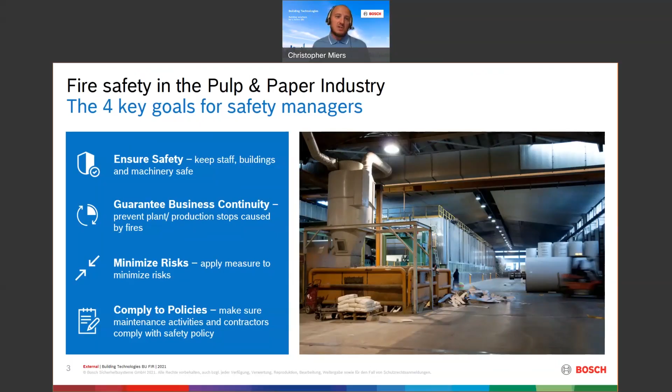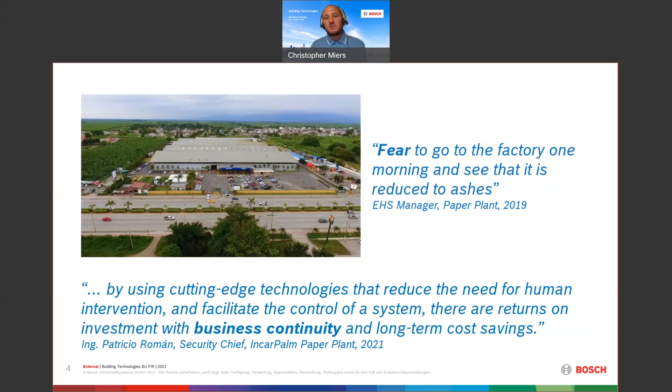So investment in cutting edge technologies enables a better return on your investment, and you're able to do more outside of just protect and analyze, we'll go into that a little more as we continue. But by using those cutting edge technologies that reduce the need for human intervention and facilitate the control of a system, there are returns on investment with business continuity and long-term cost savings. Extremely important.

So looking again at the pulp and paper industry, all different types of scenarios within a facility. You either need to look at production areas where you have small to large machines. The risk within those machines could be conveyor belts going into the machine, hot surfaces, overheating machines, static electricity. All those types of things are focused specifically on that production area or that machine, again a single machine focus as opposed to, say, maybe a larger area focus.

And we have service areas, so more fire risk due to damaged wires or equipment, boilers powered by flammable liquids or gases, or sparks in those areas. And when you have sparks and there's dust or dirty environments, you can fully understand that those risks will certainly increase the dirtier or dustier that environment would be.

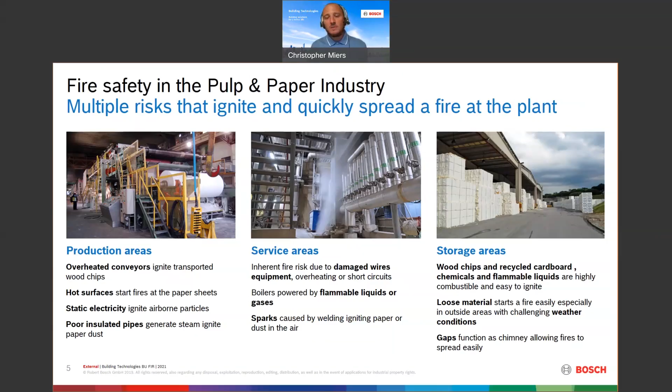And then we also want to focus a little bit on storage areas. Those storage areas typically are outside but up close to the building, have some sort of sheltered area over them, something to give it a little extra than just being fully in outside elements. But in those areas, wood chips, recycled cardboard, chemicals, flammable liquids, those are all things that typically go in those types of areas and are all high fire load.

So again, specific challenges require a solution. Multiple things to look at: high fire load, storage of highly combustible material, combined with the manufacturing process—similar to what we talked about with the machine, where something's coming in from external to internal, and all that environment is certainly unpredictable, plus the difficult environment within or even outside of that building.

So paper dust, dirty, dusty, humid—we don't focus on a lot of this maybe in industrial facilities, but obviously now we're talking about the pulp and paper industry. It's not something that at the end of the week everybody goes through with a dustpan and a broom, and when you walk out of there, you could probably eat off the floor. These are areas where people work hard, work quickly, and these products are something we want to get out as quickly as possible.

And then again with the outside storage areas, you always have challenging climate conditions to be aware of. So all of these specific challenges would require something additional on top of your traditional fire detection systems, which, as you've probably experienced in the past, could take a long time to identify a fire.

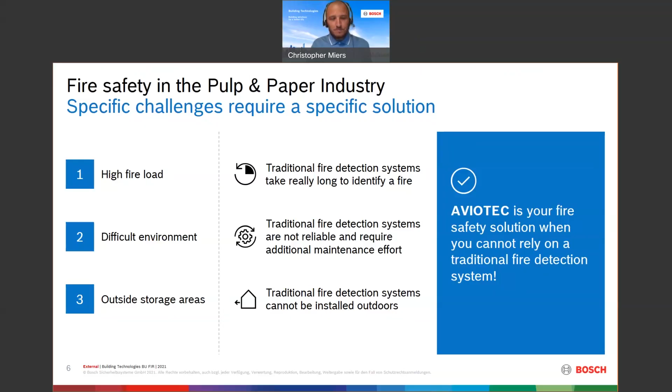Okay, looking at some of the use cases here. When a traditional fire solution is slower to alert, with standard fire cases, identifying flame or smoke within seconds is how we want to overcome that. It's detection directly at the source. Height is independent of detection, and it also works well in bad lighting conditions. Every facility is different, so we want to make sure Aviotec is available for almost any of these types of conditions—a fire starts fast, directly at the source.

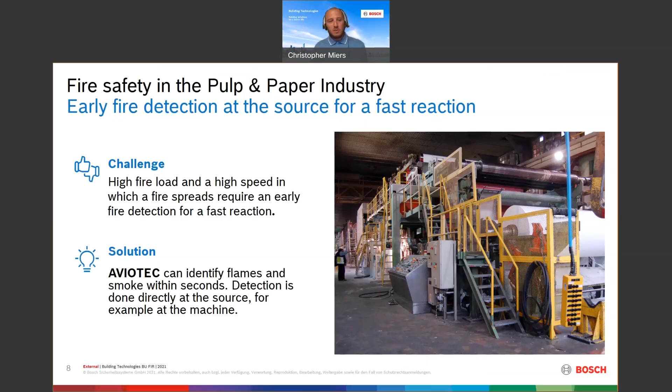And we want to be able to analyze that video source as well, so even later we can grant better safety, knowing the situation at hand. At the end of the day, we want a quick reaction to increase safety and avoid evacuations and/or business interruption. As we stated at the beginning, if you have a business interruption or have to replace a machine, that's extremely expensive.

Now, detection in difficult environments—the challenge of working problems for regular fire detectors due to humid and dusty environments. Dust will impede fire detection, it increases your safety risks, and it increases false alarms. So AVIOTEC slides in again when traditional fire detection is not appropriate.

And you'd also have a housing that protects the camera from outside elements, whether it be weather, dirt, or dust—stuff that would also probably do more damage to a standard fire detection piece like a smoke detector or linear detector, something like a beam. So those dirty, dusty environments tend to be a lot more harsh on traditional ways of doing fire detection.

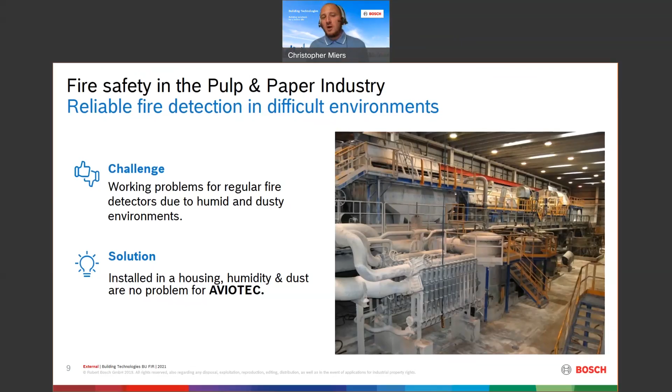Also easy maintenance in these types of difficult environments. Typically with the traditional style, you have an increased maintenance effort—whether you have a conventional or an addressable system, if you don't know exactly where that detector is, the service on those can get extremely high. Easy maintenance with AVIOTEC is not a problem, and you're compliant with that housing, so you get not only compliance but easier maintenance measures, day to day, week to week, month to month, year to year.

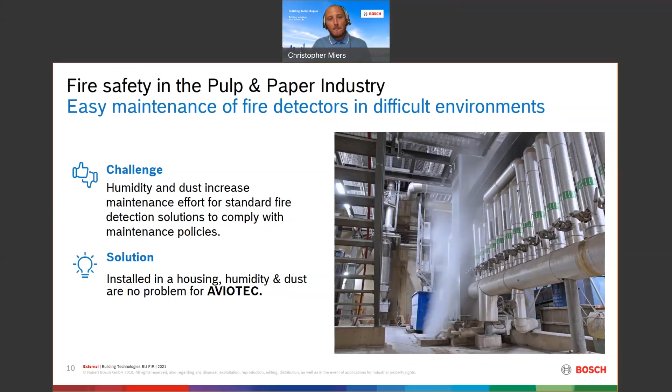And then also with the sheltered outdoor storage areas with highly combustible material, this new solution is based on something you've never really seen before for these outside environments. Typically people go with something like thermal detection, whereas Aviotec takes into consideration these outside conditions, hitting it directly at the source. Again, it's something we can do within seconds, as opposed to having to wait or decide if it's a false alarm or not.

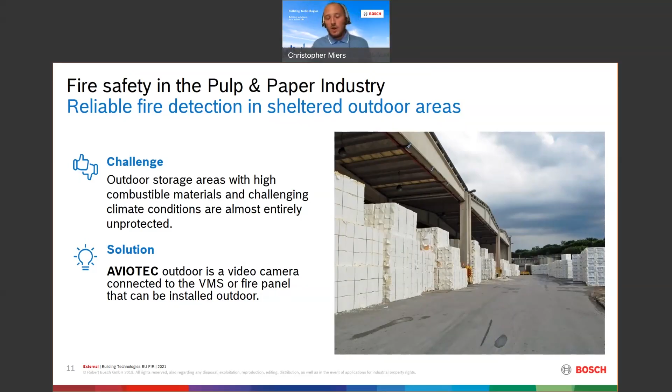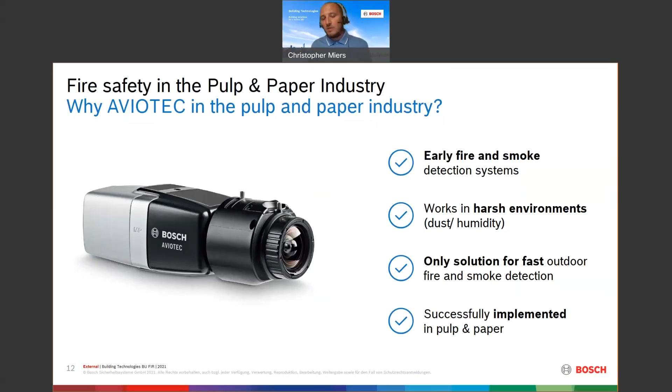That's the other part that's extremely important - seeing this work already in these types of environments, and the success that we've had with this camera makes us super pumped to talk about this solution, and make sure anybody with these types of conditions in their facility gets knowledge on this product and can decide for themselves if this is something they want to implement for additional safety measures.

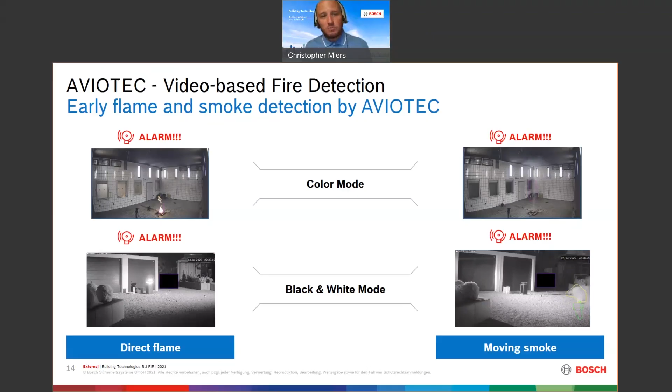In color mode, it does take a little bit longer because we have the whole video sequence and the flame or smoke needs to start to be detected. I'll let this go through so you can get an idea of what looking at the source would be like, in some of the demos we provided. You can see it's still constantly looking and identifying, that on the bottom left there.

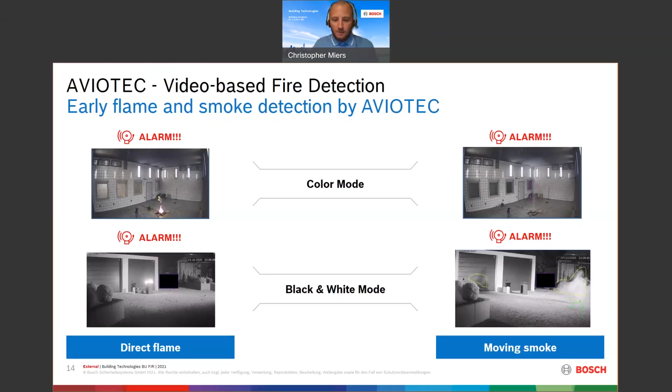Now, how does it work? You see that flame or smoke at the scene - the algorithm is integrated into the camera, so it's not a software-based system. It is directly in the camera, and it'll analyze that scene in real time at the source, and then that'll live stream, and alarms are transmitted via a network to the monitoring center.

Now, because I mentioned the algorithm within the camera, at the source, I know one question would be, well, aren't there other analytics involved in these cameras? And the answer is yes. It's still a Starlight IP 8000 camera - we've added in the smoke and flame algorithm to make the camera even better. But the flame and smoke algorithm will also work in parallel with all the other standard IVA functions. So it's kind of a hybrid, for additional safety or security measures.

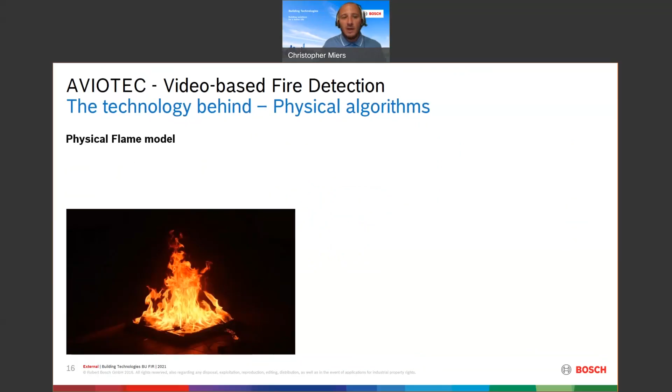Looking at those models separately, because they will alarm separately, you have the physical flame model. The characteristics we're looking at with a flame are the core or shape, the flickering effect, and the illuminance rating. Looking at the smoke model, it's that motion of transparent objects, upwards or sidewards movement.

As we move into the outdoor sphere, different climate conditions are always going to be there. We even see this in indoor climates as well, where you get some sidewards movement based on the environment within that facility. And that's why, in this case with sidewards movement, it's never going to get up to a standard smoke detector or a beam. So really, when traditional fire detection is not available, AVIOTEC is the way to go - and it distinguishes between uprising smoke and objects.

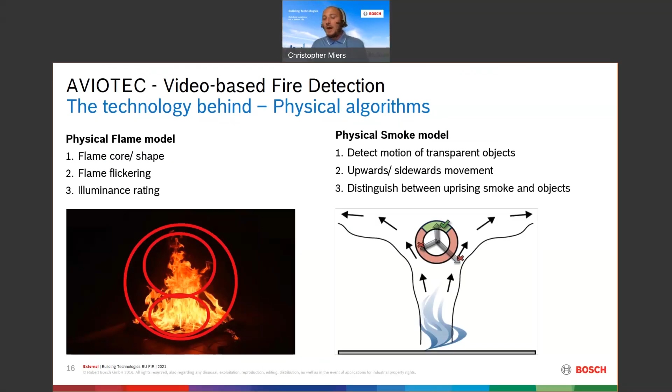Now, the technology behind it - we're looking at all these characteristics. The camera is analyzing the scene constantly: density, turbulence analysis, color analysis, motion analysis. All these things are going on behind the scenes - that's your supported AI. All at the same time, it's determining what is this - is this smoke, is this flame, do I need to go into an alarm?

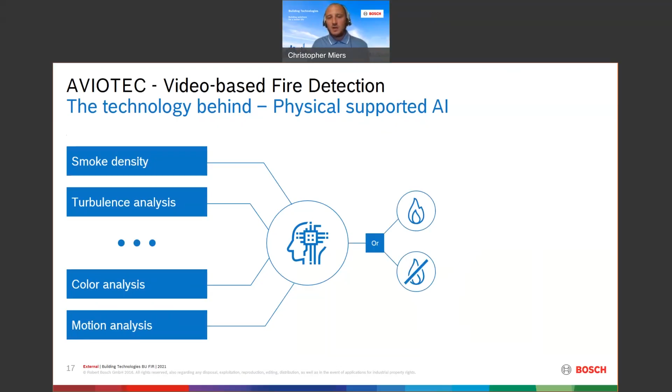Is this something that's trying to trick the system? So basically what the system is constantly doing is thinking, thinking, thinking, and then deciding - is it a flame or is it not a flame? Is it smoke or is this not traditional smoke? So it's a combination of a physical algorithm with artificial intelligence, giving you more input into the AI alarm decision.

Minimum illumination levels reduced now to 2 lux, which, if you look at even competition in this sphere, I would certainly put AVIOTEC up against anything else out there. And you also have a higher detection range, so more false alarm robustness - that's something we're constantly working on as well.

As AVIOTEC moves forward into the future, we're always going to do everything we can to better the algorithm, add to that algorithm. In just the last few years that AVIOTEC has been available, we have certainly done so. And most importantly, any updates we have would be available for free to our users via their firmware updates right on our product page.

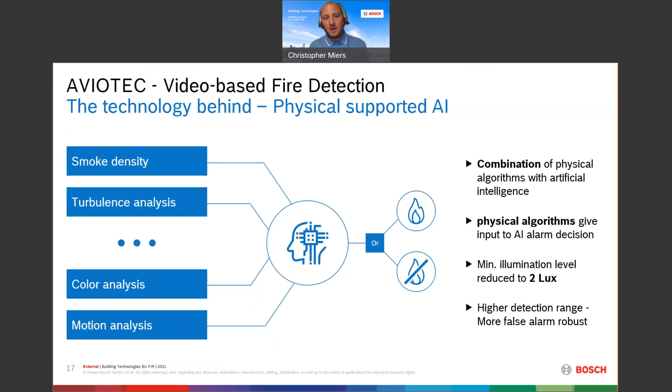The more that we do with the camera, the more that anybody will get as their journey with AVIOTEC continues as well. Now let's look at some references.

References are important, as I stated earlier, because you're not the guinea pig. We aren't in the space now where we're still wondering if AVIOTEC is the right solution or a good solution. We've had a lot of success with this camera. When we look at those specific pain points, we really want to make sure that it's a technology available for people in these crazy environments.

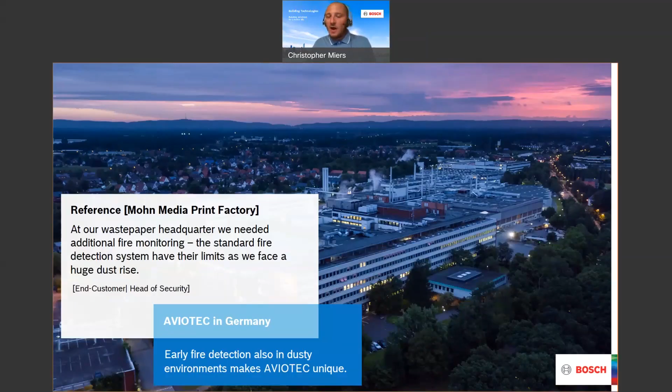One in Germany, at one of our waste paper headquarters. They needed additional fire monitoring. The standard fire detection system has limits, and they faced a huge dust rise. So again, in that dusty environment, AVIOTEC was able to plant itself as a viable solution to get around that.

And then one of our cardboard factory warehouses in Chile. Due to independency from ceiling height and the video image, AVIOTEC can cover more than just one level of shelves, and it's a cheaper solution than some of the standard solutions. This was somebody that had shelving for their products. There are also larger distribution centers that this would work very well with. So that field of view at the source is going to be very good for you, even if stuff is mounted on racks, etc.

Placement of cameras is important, and we offer a lot of resources to our users and system integrators to prepare in advance for placing these cameras and what the coverage areas would look like. I would certainly recommend anybody go to the product page for AVIOTEC and take a look at the marketing tools we have, the planning tool available to look at coverage areas, and other information on top of what we've provided today.

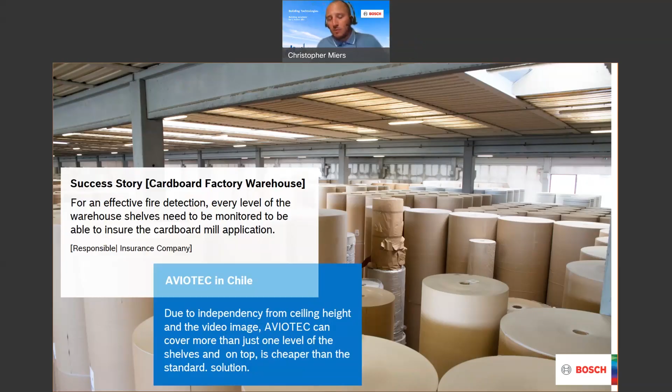And then here in the very near future, our outdoor storage solution, which currently is a proof of concept, is something we'll be releasing hopefully at the end of the month. So probably within the next 30 to 60 days we'll have this outdoor release available.

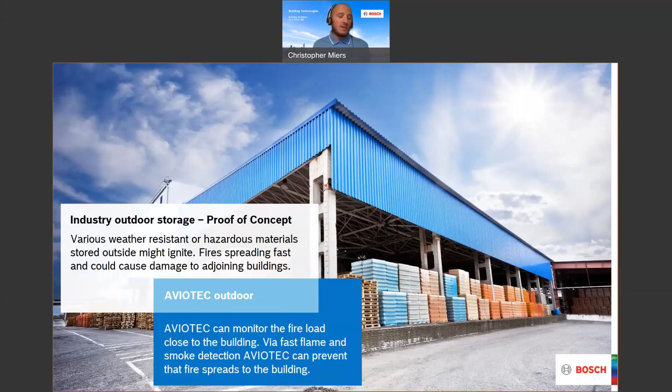Different weather resistant or hazardous materials stored outside may ignite, and that stuff would spread fast, causing damage not only to the surrounding area but potentially pulling these fires inside and causing more damage to the whole facility. So having this technology available very soon for these somewhat outdoor environments is definitely going to be huge for us, because it provides a solution for a lot of people that had nothing they could use there previously.

That's all I have for you guys today, looking at the story of AVIOTEC and pulp and paper. Again, it's very important to know your pain points. If you're not specifically in pulp and paper, pain points are still very important. Understanding your risks and what you're trying to cover, as we continue with AVIOTEC and have these discussions, you'll understand more and more what to be looking for and how AVIOTEC can overcome that with its technology.

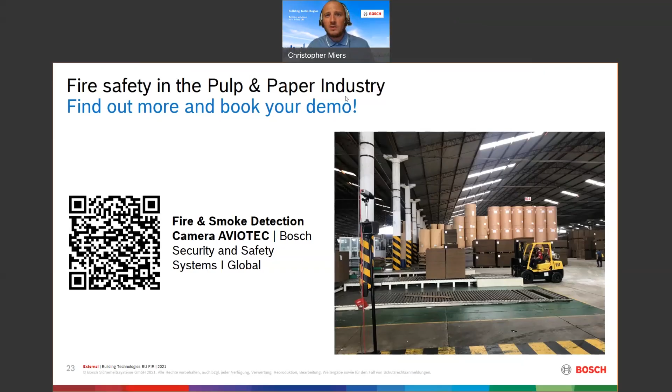Now I'll stop sharing my screen and go over to the Q&A. A few questions we've had a lot in the past: which systems can process AVIOTEC alarms? They're transmitted via metadata, relay, or ONVIF.

What effort is needed to configure the camera? There's no need to configure, because in the camera itself some parameters can be set if needed. It's very, very easy to go through that configuration process.

How do I see the alarm? Seeing the alarm depends on the management system that's used. You can use the web interface, or I'd suggest going to the operation guide just to see what's specifically available to view that alarm.

Third-party management systems: obviously we'd probably want you to use the Bosch video management system first and foremost, that would be the best case scenario. But we are compliant with Milestone, SeeTec, and Genetec as well.